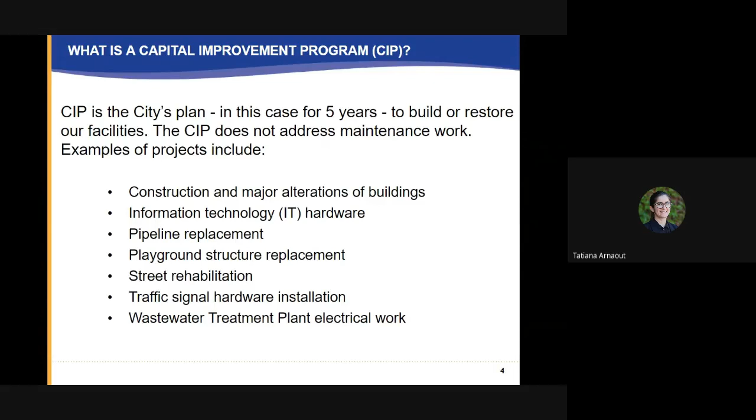So for starters, what is a CIP? Generally speaking, this is a city's infrastructure plan to build or restore our facilities. It does not address maintenance work, but some projects may include construction and major alteration of buildings, hardware for IT, replacement of cast iron pipes, asbestos pipes, replacement of playground structures, the infamous street rehabilitation, installation of new traffic signal hardware, and various work at our water and wastewater facilities or environmental resources, things of that nature. So basically anything that is city owned that needs to be improved upon or newly built will essentially be a part of this capital improvement program, and Public Works will typically lead the construction of said things.

So what projects qualify under the CIP? It must meet two criteria. First, it must consist of the construction, erection, alteration, renovation, improvement, demolition, or repair work involving any city-owned facility. Second, it must cost at least $100,000. I do like to note that studies and rolling equipment purchases do not qualify under the CIP. We usually handle those through our operating budgets separately. Now, studies may end up showing projects that will need to be added into the CIP; however, that's not a part of the CIP quite yet.

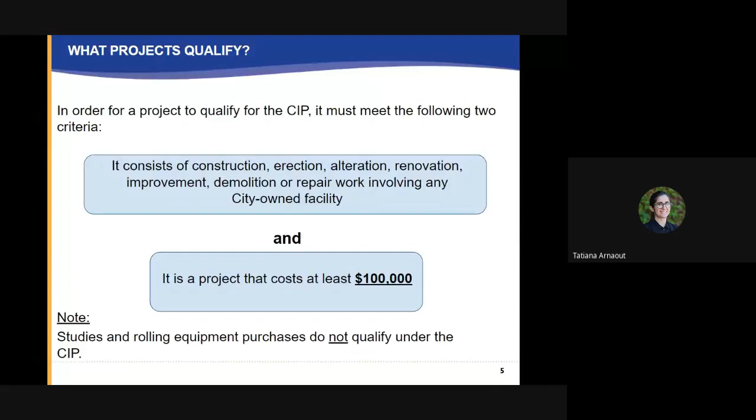So what does the process look like? First, the departments identify the necessary capital improvements. This is citywide, not just Public Works - Public Works reaches out to every department, and we identify what facilities need what type of work. In addition, we are also striving towards putting together assessments throughout the city for various facilities. Stormwater infrastructure is another assessment that needs to be done in the relatively near future, and that's one thing we're working on right now.

Staff then reviews those projects for conformity with the general plan and any other need assessments like the ones I just mentioned. Then we go ahead and verify the cost estimates and determine the funding priority based on various criteria we'll get into. Then staff presents the CIP to the Planning Commission, which we already did back on March 18th of this year, to determine conformity with the general plan itself. Finally, we present the CIP to the Public Works and Transportation Committee, such as in this instance, and then it goes to City Council for final approval.

So the CIP is organized in such a way that it highlights examples of projects by funding source, council district, and fiscal year. We have appendices that sort them in various ways: first by fiscal year then funding source, Appendix B by fiscal year then district, fiscal year alone for Appendix C, and finally Appendix D by fiscal year then by priority. These projects are also categorized into 6 categories: buildings, IT, parks and open space, seawalls, transportation and drainage, and finally utilities.

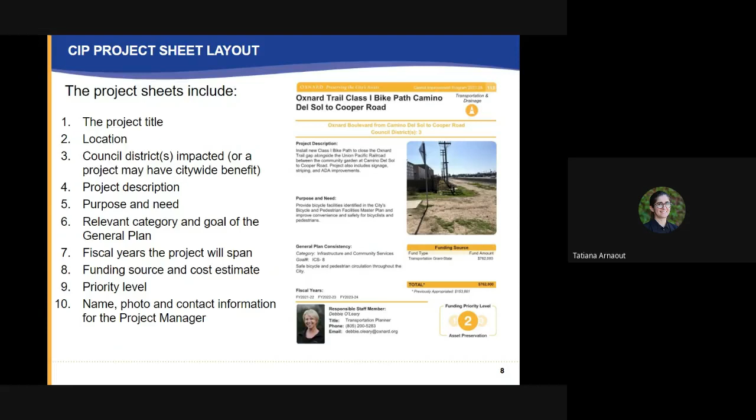We also show the fiscal years that the project is anticipated to span, the funding source and cost estimates, the funding priority level, and finally, the name, photo, and contact information for the relevant project managers. In some instances, you'll see TBD in that section, because that's a project that's an outer year, so we have not selected that project manager at this time. However, we've identified the project itself. Just for your information.

So what is the role of the Public Works and Transportation Committee? Basically, the task of the committee is to recommend, and later for council to determine, which CIP project should be funded in which fiscal year. The only projects that the committee is recommending and council is approving for selection for funding are those in fiscal year 21-22.

Now, getting into the new projects that are going to be found in this next iteration of the CIP, we've highlighted a couple here, the first being one that came out of the council priorities discussion, which is the Oxnard Aquatic Center. We also have the Ramona Preschool Pedestrian Crossing Enhancements project. We actually did just obtain a grant successfully for that, and so we are going to initiate that project here in the near future. And then also the Wi-Fi in the Parks project. The intent is for the city to deploy Wi-Fi in various parks throughout the city to give access, especially to the children in our community who do not currently have access to internet at home.

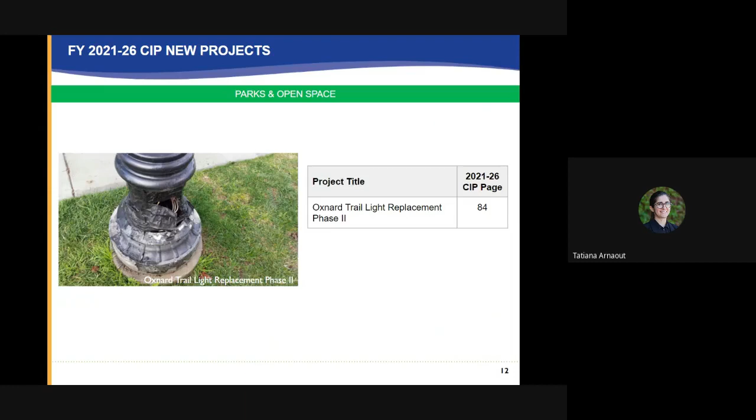So under the category of buildings, we have 5 projects: the Oxnard Aquatic Center, the public restroom improvements, the senior center at 5th and Patterson, which actually was one of the council priorities as well, and then also tenant improvements at both the South Oxnard Senior Center and the Wilson Senior Center. Under Parks and Open Space, we have the Oxnard Trail Light Replacement Phase 2 project.

For IT, the only new project here is the Wi-Fi in the parks, which I mentioned previously. Under Transportation and Drainage, we have a few projects, including citywide intersection improvements, railroad crossing upgrade at Cypress Road, 5 Points intersection modernization, as well as 5 Points intersection traffic signal rehabilitation, and the Oxnard Trail Class 1 bike path from Camino del Sol to Cooper Road, which is another grant-funded project that we were able to obtain more recently.

Continuing on under Transportation and Drainage, we have now added also the Oxnard Trail Class 1 bike path from Cooper Road down to 2nd, the Ramona Preschool Pedestrian Crossing Enhancements project that we did receive a grant for recently, and similarly the Safe Routes to School Safety and Enhancement project, which we actually just received a grant for as well over the past month or so. That's exciting news. We've also added the stormwater conveyance improvements along Oxnard Boulevard. And finally, under Transportation and Drainage, we have the US 101 Del Norte Interchange Upgrade project.

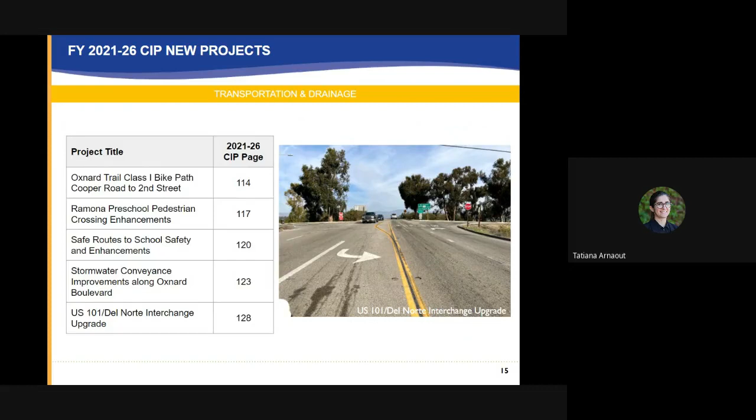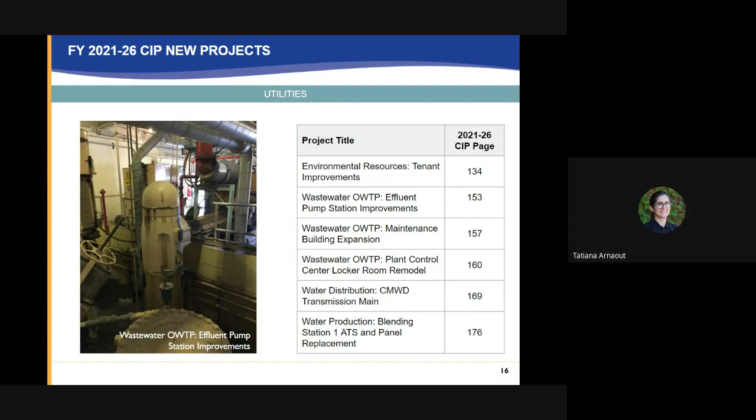Under Utilities, we have just a few: the tenant improvements for environmental resources, effluent pump station improvements at the Oxnard Wastewater Treatment Plant, the maintenance building expansion at the wastewater treatment plant, and the plant control center locker room remodel at the treatment plant. And then under water distribution, we have the CMWD transmission main project that we are adding. That is a critical project, as that transmission main currently supplies over 50% of the city's water supply. And lastly, we have the blending station, transfer switch, and panel replacement project.

Now, we can't talk about the capital program as a whole without acknowledging that we do have underfunded capital needs. So I'm highlighting here some of the most impactful underfunded capital needs that we have, but this is not an all-inclusive list. This is just highlighting those that impact the residents the most.

So, citywide street improvements and citywide alley reconstruction. For street improvements, we actually only have a guaranteed funding source of about $4 million through RMRA or SB1, or gas tax, at any given time. So every year, that's the only amount of funding that we have that is what I call guaranteed. Any funding outside of that has to come either from the general fund or other funding sources that we would need council to help us determine, and they'll have to prioritize that against other needs throughout the city. Same with citywide alley reconstruction, that has been underfunded for quite some time.

We have not received very much funding in the past. We just recently allocated a couple million from the HERO bonds into alley reconstruction, targeting a lot of the alleys down the Oxnard Boulevard corridor. But at this time, it's still a severely underfunded capital need.

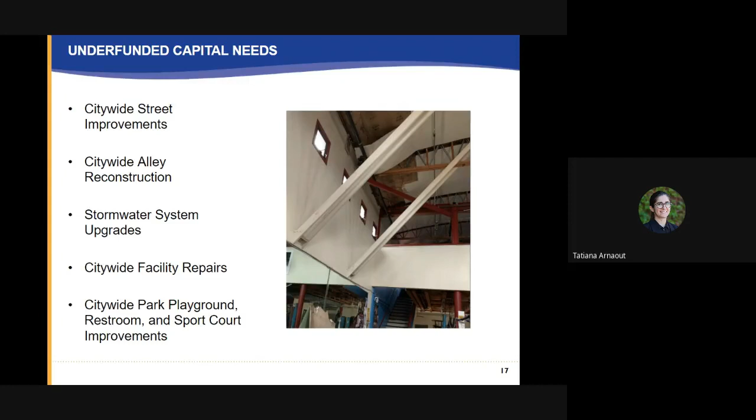So what are some of our challenges here? Not only do we have challenges in terms of not having enough funding to actually pay for the improvements themselves, but we also have limited resources across various city departments that affect workflow. Here in Public Works, for instance, if we were to receive more funding for any of those unfunded capital needs, then we would actually need more staff to be able to manage those projects and see them through completion.

But we also have to consider that as Public Works staffs up to complete these projects, we're impacting our friends over in finance and purchasing and risk across the street, because that means more contracts being taken across the street, more invoices, or other administrative tasks that affect not just Public Works, but other departments. While we in Public Works have an idea of what we need in terms of resources, we all have to consider that they'll have a need as well.

Additionally, there's an anticipated increase in workload due to Measure E. Same concept - as more funding is available, that means we get to do more work, which is great news. However, we do need the resources so that we can appropriately execute those in a timely manner, and do it well. In addition, we have been experiencing severe construction delays due to material shortages.

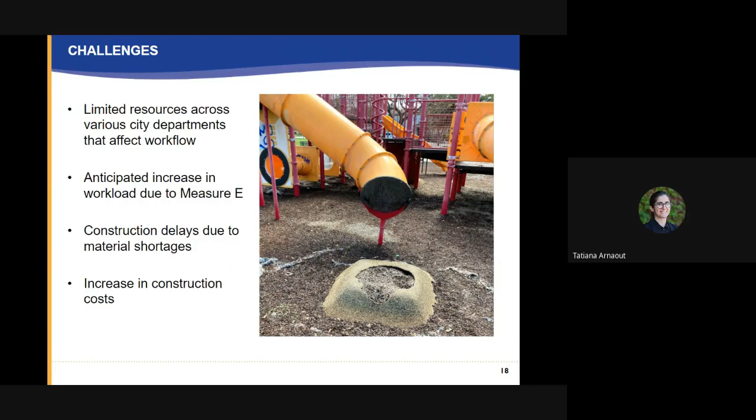So what other resources do we need to accomplish these goals? For starters, we'd like to issue an on-call construction contract for street resurfacing, alley reconstruction, and ideally something for roof repairs and replacements to get those done in a more timely manner. Playground replacements is another on-call construction contract we're seeking to get approved, just to have the ability to execute these projects more quickly, making us more efficient across the board in delivering this project to the residents of the city.

In addition, we do need more staff to manage these projects, and with more staff means more office space. As it stands today, here in Public Works, Engineering, and Traffic, we are pretty much at capacity. So any staff increases will require us to consider where we can actually house those staff members. Just something I'd like to highlight because it is something we are contending with right now.

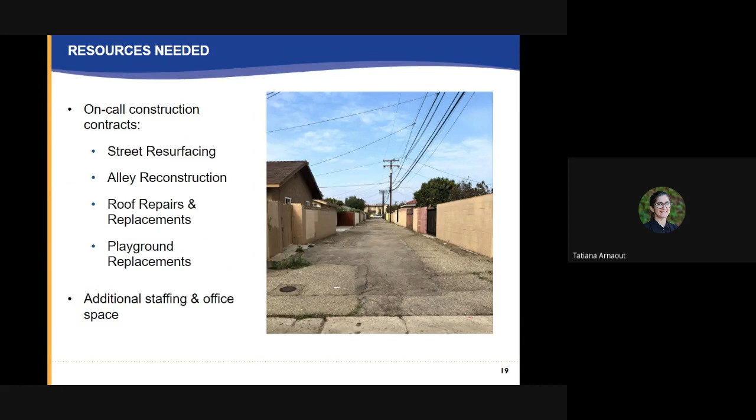And finally, I'm getting close to the end here. So the fiscal year 2020-21 accomplishments.

We have 35 projects that are in the design phase actively right now. We have about 12 that are in the bid phase. We've awarded $35 million worth of projects, or another 15 projects this fiscal year that are currently in construction, and we were able to complete 15 projects totaling $15 million. That's not to mention that the projects currently in bid preparation or already out to bid total more than $50 million. So there's a lot of work happening over here in Public Works in the background, so to speak, but this is my opportunity to highlight to you all what it is that we do over here.

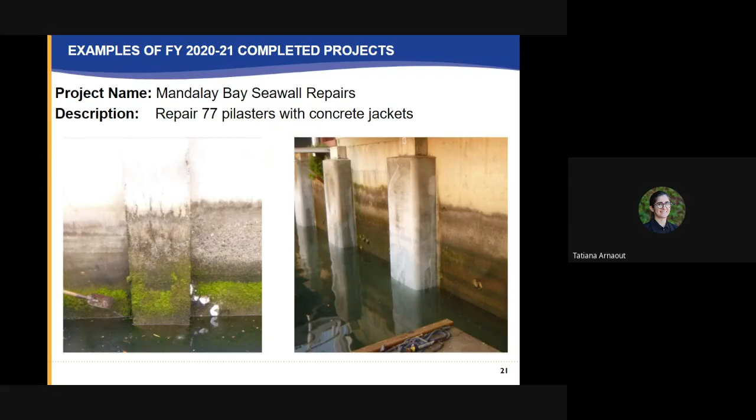Here's some examples of the projects that we did complete this year. We completed the Mandalay Bay seawall repairs project, which included the repair of 77 pilasters with concrete jackets. Here's some before and after photos for that. That was just completed in January of this year.

As many of you have probably noticed, we resurfaced and did preventative maintenance for 73 lane miles throughout the city in this fiscal year alone. This before and after shows Esplanade Drive, one of the streets that was in worse condition with a high average daily traffic count. We've actually gotten a lot of comments on this street, and Rice Avenue as well. We will continue to tackle our streets as fast as we can, and it's really all dependent on how much money we are able to receive to continue those endeavors.

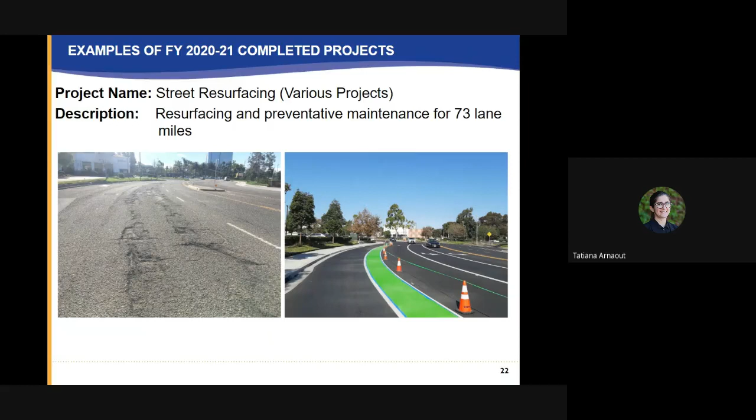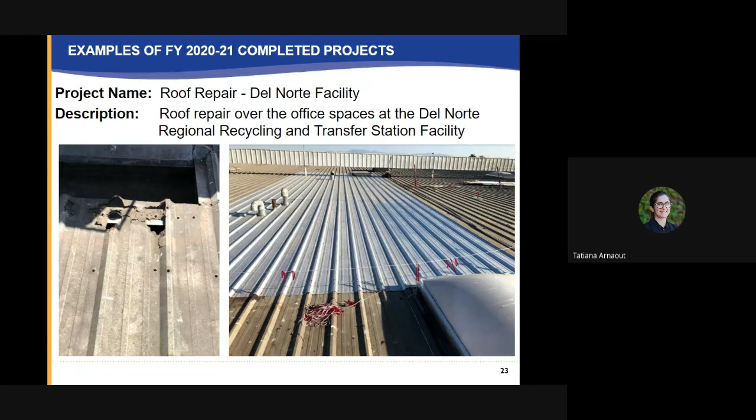We did a roof repair over at our Del Norte facility, where the materials recycling facility is. This was over the office spaces, which had been leaking over the equipment in some cases and office spaces. That's been taken care of, and we are looking to do a full roof replacement over the rest of the facility. That's currently in design.

Here I'm just going to go through the list of projects that were completed. While we don't have before and afters, I'd still like to make note of what was completed. We anticipate the Powell Roof South Wing is completed this fiscal year. The Oxnard Trail Light Replacement Project, from Entrada Drive to the path adjacent to the community garden in La Colonia, has been completed. I already mentioned the pilaster jacket repairs at Mandalay Bay.

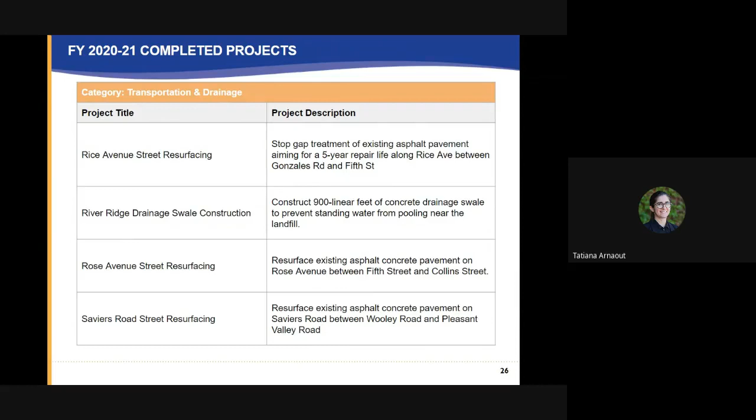Here are the various street resurfacing projects included in that 73 miles I mentioned earlier: the commercial area street resurfacing, commercial central neighborhood, the Five Points neighborhood, and Rice Avenue. We did a drainage swale construction over at River Ridge for regulatory purposes, which has since been completed. We resurfaced Rose Avenue as well as Saviers Road.

We also replaced 31 battery backup systems at various signalized intersections, and we are striving to make more of those replacements in the near future for the remaining 130-something traffic signals that we have. We also completed the Vineyard Avenue resurfacing phase 2, from the US 101 on-ramp or bridge to Oxnard Boulevard.

We also installed a brand new traffic signal at the intersection of Rose Avenue and Gary Drive, right in front of Oxnard College. We also did the thin maintenance overlay phase 2, which was part of that 73 miles citywide preventative maintenance. For our folks over at Utilities, we will complete a tipping floor restoration by the end of the fiscal year, and I already mentioned that roof repair at Del Norte.

As far as financial impact goes, there's actually no direct fiscal impact with the adoption of the proposed 5-year CIP. The CIP provides just a full fiscal presentation of the capital projects planned to be undertaken in the next 5 years, provided that funding is actually available. I do want to note that the projects that council identifies and approves to be adopted in the CIP for next fiscal year, 21-22, will be presented for adoption during the city's budget approval process in June. So you're not approving the actual budgets for those projects right now; we're just adopting the 5-year capital improvement program.